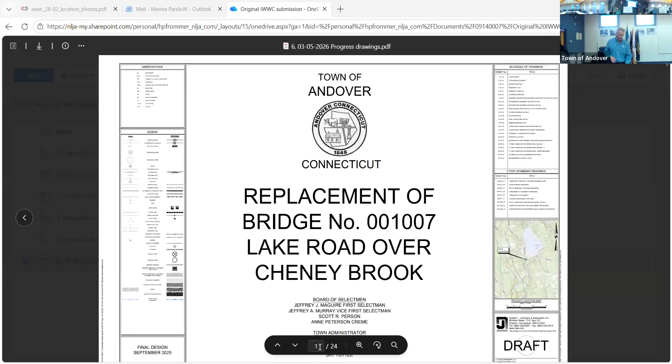I guess you guys probably know Joe Dillon. I've been working on this project for a few years here. It's a town project, so I'm here representing the town. This is a small culvert project, probably big for this town, and it's a grant funded project. I'll get into that a little bit later. I've got maybe 5, maybe 10 minutes of stuff to tell you, just to give you a quick smattering.

You know, this is the first meeting. Some towns don't want me to speak at all, but somebody invited me here today, so I assume you would like a bit of a presentation. Sure, absolutely. Wayne initially emailed me and just kind of told us that this was going on and how we normally go about these things. I said a presentation would just give us a background and an idea of what the plan is and what your thoughts were.

I do think the town is paying for this one, because this is a town road. I haven't gone to the finance public hearing they had the other night. If it was on a state road, the state would reimburse us. So it doesn't make a difference in the presentation, but I do think the town is on the hook to pay for this.

This is a state local bridge program project. The state local bridge program is providing a grant for 50% of the total project cost. So it's probably a $2 million project, and we're on the hook for $1 million. You guys recently had a local bridge program project that was a little different, that was probably 100%, or an 80-20 split. That one was 100%. This one is 50-50.

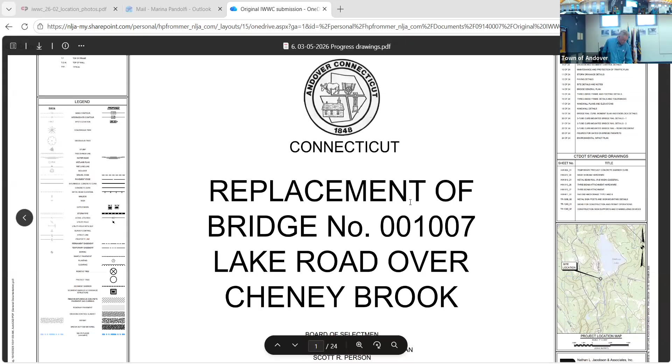Let's maybe go to the next sheet there. How about the colored one? There were individual ones they sent a few months ago, let's go to those. It's easier for these guys to see. Not that one, maybe number 1, it's probably down there.

This is our existing condition plan. The existing culvert carries Lake Road, in an east-west orientation, over Cheney Brook, which flows from the south at the bottom of the sheet up towards the north, towards the lake. The culvert is just immediately east of Bousola Road. The wetlands, you can see the brook which is a light blue, and the shaded blue on the outside of that to the first dark line is the wetland line. The green line way over to the left of the sheet is a 200-foot upland review line, and the next line to the right, the blue one, is 100-foot.

If you look over to the right you'll see a little bit of green, and to the left there's a little bit of light blue. The darker blue dashed line upstream and downstream is the 100-year existing floodplain, just to give you a sense of how much of the woods would flood during a 100-year storm event.

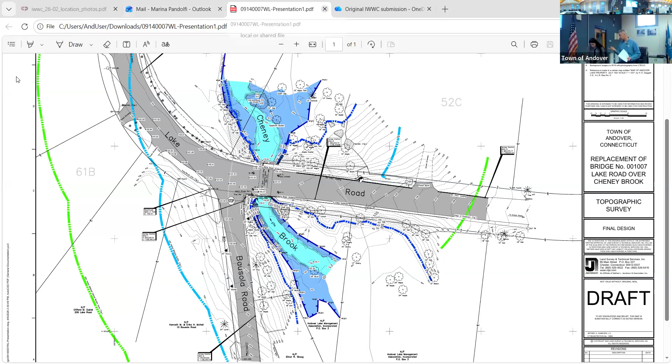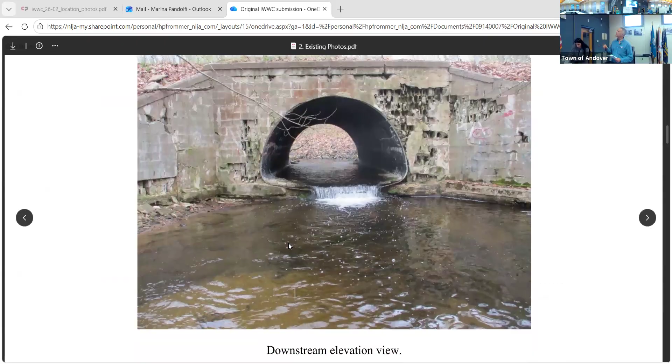So the problem with the culvert is the downstream wing walls and parapets are cement masonry units, and there's 100% section loss of a number of face shells and webs on random sections. Let's see, keep scrolling down. Okay, there you go, good enough to see. So that's the downstream side, each one of what you're looking at is cement masonry units. I don't know exactly what's behind that, it could just be a vertical wall that's not very wide. So there's not a lot left holding the road up.

Roadside barriers don't meet current standards of design, and of course I mentioned the perched outlet. The upstream side of the bridge has cast in place wing walls and head walls, but for whatever reason on the downstream side here, they used cement masonry units.

To show the proposed plan, it'll be the second colored plan. So it was the email that I sent tonight that had two PDFs. That'll be the one that says number... Blue, yeah, that is out in there.

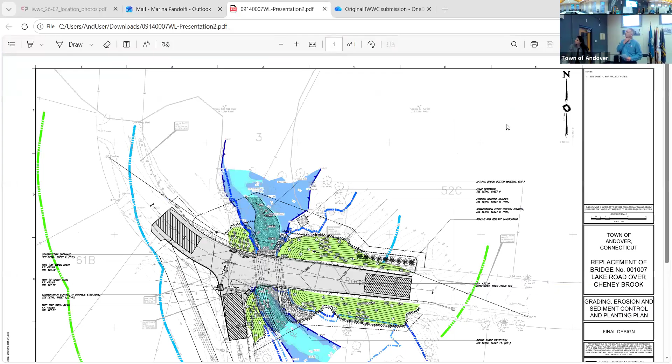Okay, so this is colored. It's a little bit busy, but it's colored, so I think you'll get the idea. The extent of the road work is at the limits of these hatched areas, which are basically road construction entrances. But you can see the limits of the road work. The width of the road is going to remain the same at 30 feet, the geometry is the same, both the vertical profile and horizontal profile is the same. The intersection with Bousola Road is essentially the same, although when you pull out of Bousola and take a right, the radius is going to be enlarged a little bit.

There is some storm drainage. You can see three catch basins around the Bousola Lake Road intersection. Those are going to discharge through the wall of the proposed structure. The proposed structure is going to be a precast reinforced concrete three-sided frame, so it's sort of like a box culvert with no floor.

And that's going to sit - I'll show you a detail later on, you'll understand it completely - but it's going to sit on a cast in place reinforced footing, which is going to be poured directly on the rock. And then the rest of the concrete portion of the bridge will also be cast in place, reinforced: the wing walls, head walls, bridge rail parapet, end walls. I'll show you some details afterwards just to get you a quick view of that.

The bridge was designed hydraulically per the DOT drainage manual for a 100-year storm event based on the contributing drainage area.

Roadside barriers will be improved. We'll have a bridge rail and approach guide rail which will meet the current standards. I'll show you this on another detail too, but inside the barrel we're going to have riparian shelves on both sides of the channel. So for those terrestrial animals - and I've seen this actually - they'll like to run along the edge of the stream rather than having to go up over the embankment, with a potential mortality issue. Now they can go through the barrel. That's what we did - I have seen it actually happen that way, so it does happen.

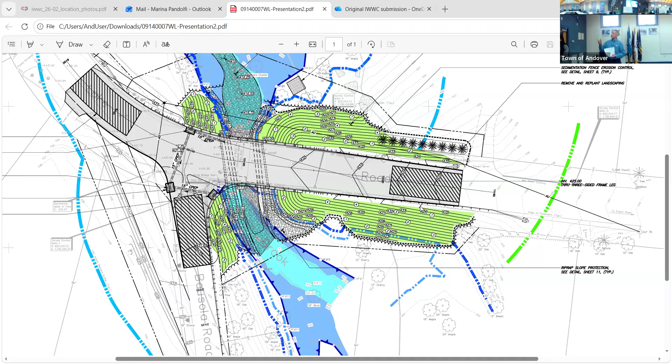From a permit perspective - actually, maybe erosion control perspective, because that's really what we're here for tonight - this is from our erosion control plan. There are erosion checks around the toes of the slopes, which are that green color, which are blankets. So blankets on all the slopes. The inlets, the catch basins will all have controls around those. There'll be construction entrances at the three entrances to the project, if you will.

We have a dedicated pump discharge point at the far northeast quadrant there. If you look downstream of the bridge to the right, you'll see a little square. So it's outside of the wetlands, but in a sort of flat area, so water coming out of that will flow back into the channel. I can show you pictures of the erosion control details if you'd like to see that.

There's also going to be, on this plan, I think we show there's 34 plants to reestablish the embankment.

Okay, yeah, and I think that's going to be it for this one. From a permitting perspective, obviously we're here tonight for a wetlands permit. The town determined that a planning and zoning CGS 8-24 permit is not required. We're going to pursue an Army Corps permit under the nationwide program that came out in the middle of March. DEP granted a 401 water quality certification for the two nationwide permits this project would fall under, to be one of the two. So that's taken care of.

As part of that federal permit process, there's some due diligence work we had to accomplish. We checked the DEP Natural Diversity Database. Based on the last map we saw, this project's not in an area of concern. We had to reach out to the State Historic Preservation Office; they had no concerns. We also reached out to U.S. Fish and Wildlife, who identified a bat and a butterfly that we're going to be dealing with. And we had to reach out to 4 different Indian tribes, and we did not receive any response, but that is very typical — no response is their response, in my experience.

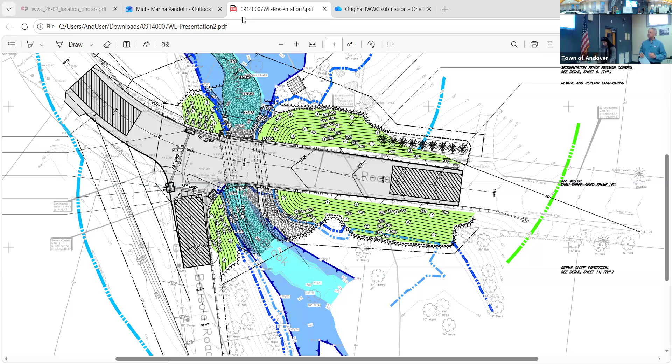So maybe what I should do — can we go back to the big set of plans? I could just show you real quickly the general plan so you can see the structure, in case there's any confusion about what it might look like.

It's in the progress drawings. It's probably about halfway through the setup.

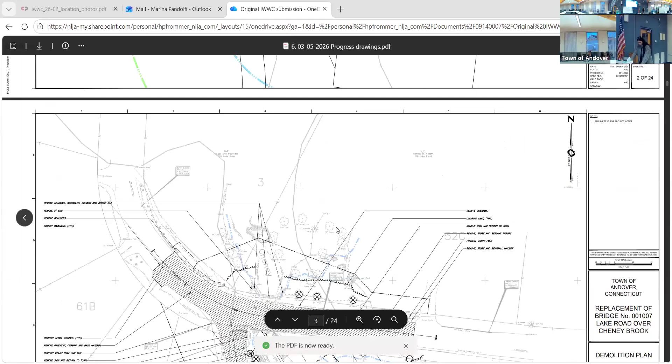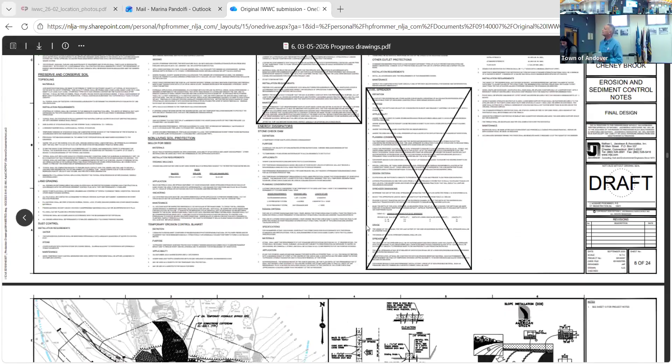Is this the original bridge for this road? I don't know — I'm not that old. For all I know, the bridge there now could have been a replacement for something prior. The lake did used to be there. Never mind.

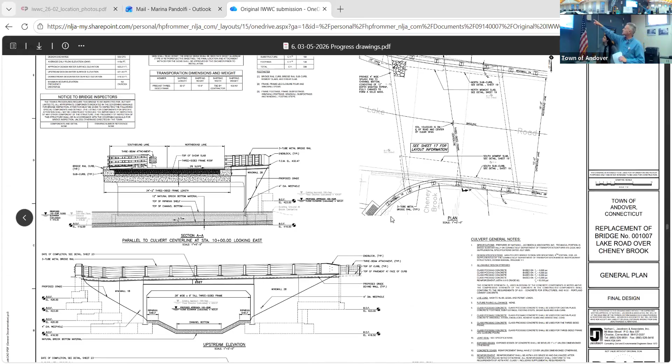Here we go, that's the one. I just wanted you to see a depiction of the elevation view of the structure, for whatever that's worth. And the plan view at the top right corner of the sheet shows the plan of the frame — you can see the parapets along the edge of the road.

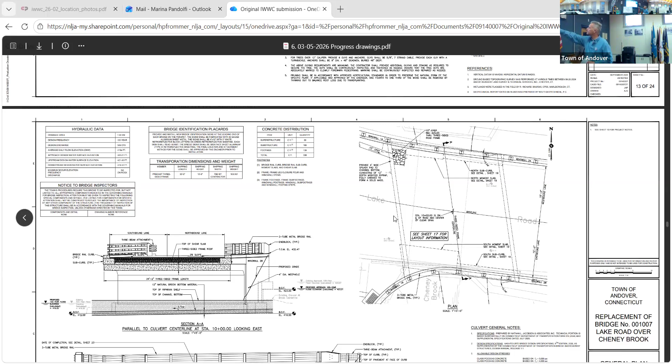But I wanted you to see the storm drain line proposed to come through the wall of the frame, with a bit of riprap beneath it because there's water dripping out, and I don't want it to take away from the riparian shelf or the channel within the barrel. If you scroll the sheet up a little, you can get a sense of the channel through the barrel — it's sort of a trapezoid with two shelves on the left and right.

So you're saying the water on the road is going to go down inside and drain into the river or stream under the bridge?

So the water on the road would get intercepted by the catch basin grates and then conveyed by pipe between those catch basins. That pipe, rather than discharging to the channel outside the bridge, would come through the wall of the bridge and discharge to the channel within the structure. I believe the invert is going to be about 5 feet above the riparian shelf, if I recall correctly.

I had difficulty trying to take that right down to the stream. The embankment is steep down to the stream, and I'd rather not put the outlet right at the edge of the stream. I'd rather have it spill onto something with some erosion control, or ideally let it cascade down a slope with riprap. This seemed to be the better alternative in our opinion. Every town's different.

How far up is the opening out of the bridge going to be? Let me double check with the sheet up there. Yeah, about 5 feet to the invert, a 15-inch corrugated plastic pipe that will go through the wall of the frame, so the invert would be at about the 5 foot level.

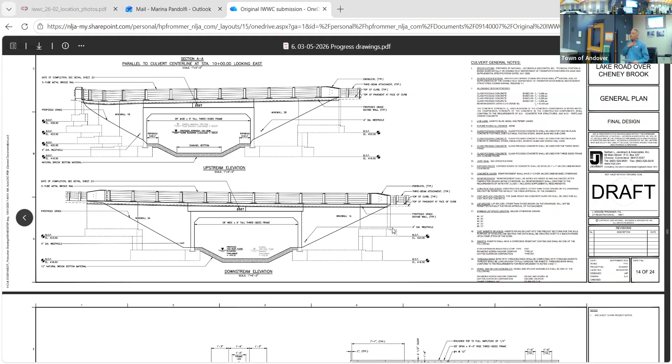How far is the riprap bed supposed to come out into the channel? I show it with a break line here. The intent is we're gonna bring it right down to the bottom, but I should probably make that a little bit clearer. I really don't want it to erode anything on its way down—that was my concern, not causing turbidity inside the channel bottom, washing out that channel bottom and having your sediment move downstream.

Construction period we're looking at is June to October, a 5 month period in 2027. We'll go out probably to bid later this year or early next year. We do have bypass pipes—we've got to do the construction in the dry, so we're gonna put 2 smaller diameter bypass pipes right through the existing pipe, then use sandbag super sacks to create a cofferdam on the upstream and downstream sides of that bypass pipe so the contractor can work dry. That was also designed per the DOT drainage manual, in this case for a 2-year storm.

That's about it, I'm opening it up to your questions. Again, it's a grant funded project, 50% town project. Right now the town is hopefully going after getting the easements—that's really one of the things that would be holding up going out to bid, but we have a little bit of time between now and the end of the year, or the January timeframe when we go out to bid.

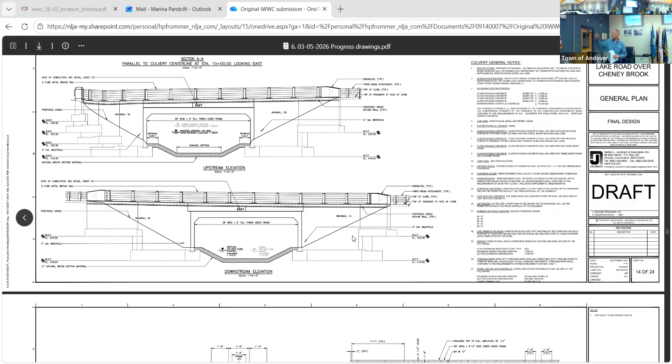Maybe the first thing I should do is go to the very last plan — it's an environmental impact plan in this deck. Maybe I start with that? Sure.

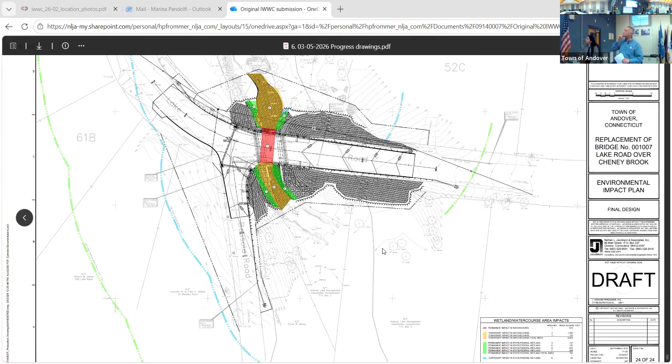There we go. Can you zoom this? So this is the last plan in the set, showing environmental impacts. There's a table off to the right of the drawing, out of view at the moment, but all these little numbers in white refer to that table. For instance, the red number 1 is a permanent impact to the watercourse — that's actually where the existing barrel is.

The green is temporary impact to the watercourse, although I believe this is an error here. On the inlet side on the left, all the grading going back up the hill should be a permanent impact to the watercourse — that should be red, so area 7 really should be adjusted. Excuse me, that's a permanent impact to the wetland, not a temporary impact.

So regarding vegetation impacts — the embankment is fairly steep out there now, and if we're grading the embankment, the vegetation will be disturbed and removed. Trees would be removed, and slopes would be regraded to a 2-to-1 slope. That's why we've reestablished the vegetation.

At the moment it's a typical seed mix. There are 34 plants proposed that our soil scientist recommended based on the moisture of the soil — planting lower near the wetland uses one species, and higher up a different species. That's sort of out of my wheelhouse.

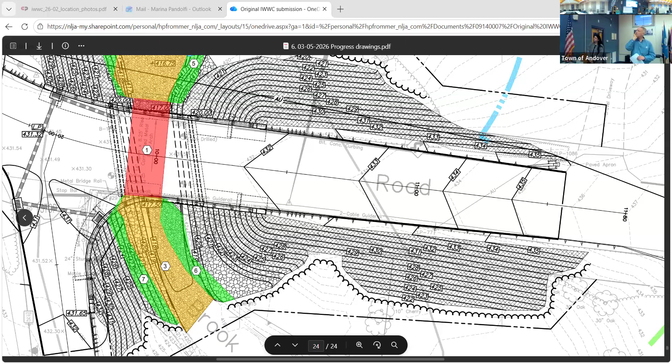So I'm saying it's steep, and it goes right down to the water. Would you think about maybe making it less steep when you get closer to the water, leveling it off a little bit?

To make it less steep getting closer to the water would be a major revision. Footings would have to be dropped on all the walls, because the grade, maybe it's a little less steep at the bottom, I don't know how much you're thinking about. And then it goes up 2-to-1 to make it even less steep, and pushing those permanent grades back would require dropping the footings more.

Our footings are sort of stepped. As the grade climbs, we don't want to keep the footings real deep because it's a waste of money if we don't need to keep them that deep. So the footings get stepped, trying to maintain frost protection over the bottom footing.

I know on the last bridge we were talking about, there was heavy discussion by Hank Gruner, and I didn't hear any of that here, and I don't know if there's just no herpetologist concerned with this one. I mean, the last one was over the Hop River, this one's Cheney Brook, but Hank is a herpetologist?

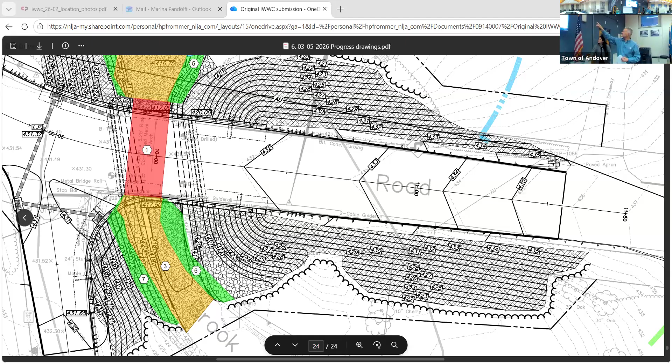I don't know if you could pan so you can see the outlet side, look at the easement lines going around everything. So there's room to move there. Maybe that's a concern on the downstream side, far left and right—there's a lot of white area beyond the woods.

Usually what we'll do is there'll be an inspector on this job from our office. That's the plan at the moment. The contractor is required to use a licensed surveyor to flag the limits, and then our inspector would walk in with them and make sure it generally follows the plan.

I've had projects before, I'm not suggesting this here, where commissions have said, I want you to put a Jersey barrier all the way around the perimeter of the work to make sure, because that's a pretty definitive thing—it's easy to knock a silt fence over, but getting a Jersey barrier, a 20-foot or 10-foot stick of it through the woods multiple times, is pretty disturbing in and of itself. Maybe the thing to do is put up silt fence and maybe snow fence also, it's a little higher, it's orange. Maybe something like that would help reinforce, not structurally, but reinforce that, hey, this is the limit.

So that external limit you have there, is that just going to be flagged or is that going to be silt fence currently? That outside line, the easement line—is it just going to be flagged right now or are you guys actually putting up silt fence? I'm not sure I understand, is it just going to be marked? Like just the boundaries are going to be marked in the field?

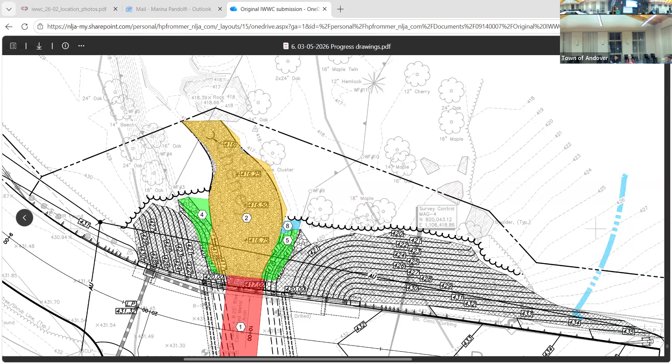If there's sediment buildup on the upstream side of the bridge, how is that going to be handled? Sediment buildup on the upstream side of the bridge.

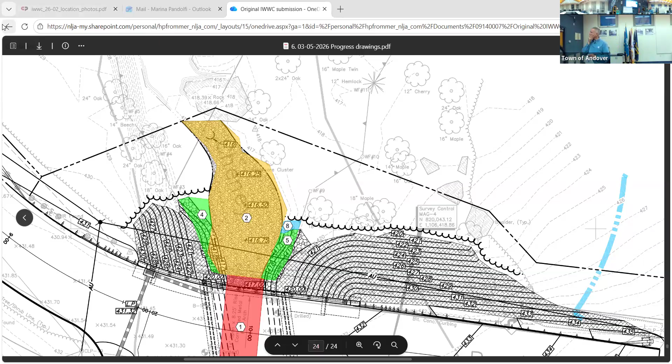Maybe we should look at the water handling plan. Let's do that, it's probably in the first third of the set. So if you have sediment buildup on the upstream side of the bridge, once that builds up, is that going to wash downstream and change the watercourse downstream? Alright, let's take a look at the water handling plan.

I have my work phone, I was putting the passcode in. How long do you have to wait? A minute. Where are you? Oh yeah, we got it fast, it's probably like sheet 8 or something.

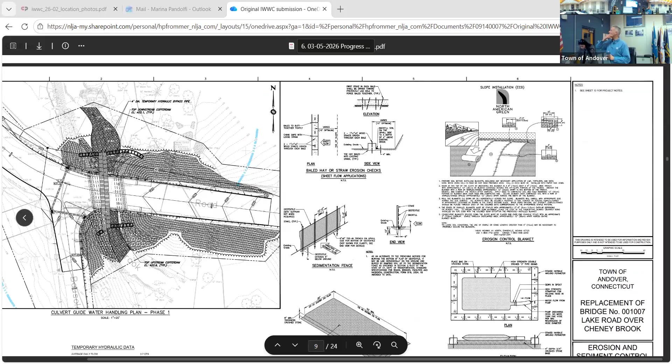So it's the detail on the top left, second one. It just seems weird that they're just one on top of another. All our bridges in Andover are just old, and that's it. We haven't been working on it.

So this is the water handling plan I mentioned before, about sleeving two smaller diameter pipes through the existing barrel with these super sack type sandbags. You guys have probably seen them, they're like a cubic yard, to create a cofferdam up and downstream.

Is there going to be sediment? How's the sediment going to be handled? The cofferdam is going to maintain the flow, so you get flow from upstream, go through the pipes, come out the other side, continue on its way. But is somebody thinking that while that's going on, we're going to get some sedimentation coming down the slopes and into the brook? Are they looking for some more erosion control at the base of the slopes? We have riprap, which is one reason to leave it, because if you do get sediment coming down, it catches there. The other thing is, we have erosion control blanket on all the vegetated slopes.

So will there not be any sedimentation? I can't stand here and say that, but I can tell you it'd be a heck of a lot better than something that was not blanketed, especially because when you first put the topsoil and seed down, sure enough you get a big rainstorm. By the time the bridge is in place, the walls are in place, most of the walls are in place, the water handling can come out of there.

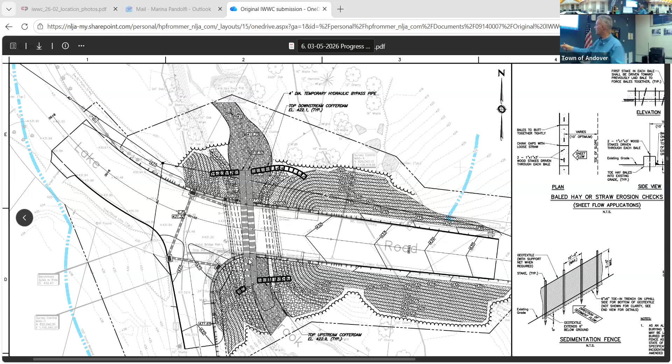Maybe I could point here, just up or downstream. As you go through the barrel on the right-hand side, there's riprap that goes all the way to that cofferdam. Can you see the hatch with sort of the circles in it? And the same on the left side, after you go through the barrel. I guess that's probably what would capture any sediment.

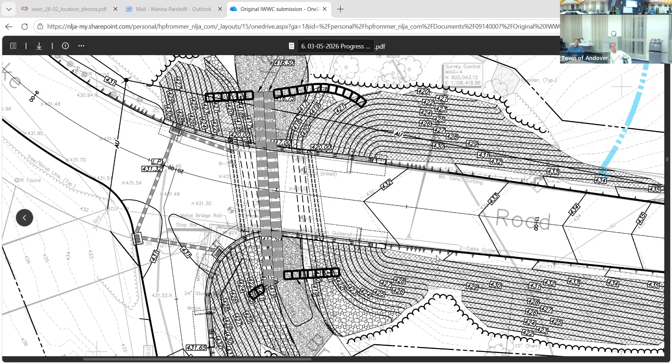Are you gonna be reworking those areas by the road, not right at the stream, but where you have all those lines and numbers? Are you gonna rework that whole area, or are you gonna leave what's there? There's rocks that are there. So I could point to it here. Is it right here, Bill? Yeah, that spot, but you're along the stream edge. Can you zoom into the outlet area in particular?

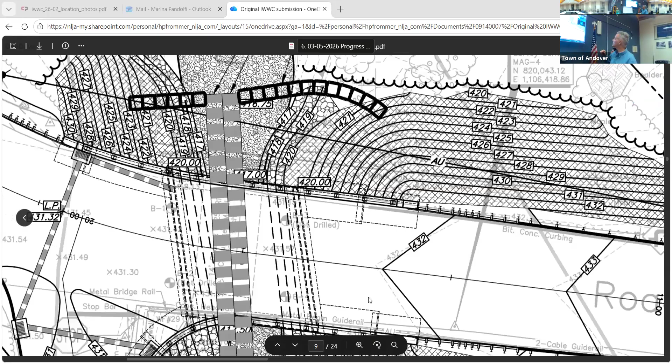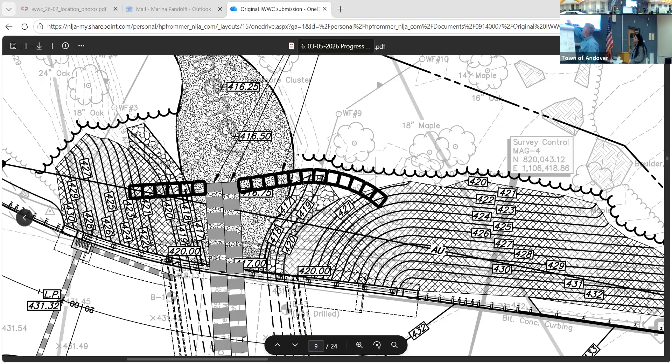Okay, so this area is sort of a continuation of the riparian shelf. It's fairly flattish compared to the 2-to-1 slope. So to your point, you come out of the channel, the channel needs to have a little bit of a defined bank, and you're coming up out of that channel about 3 feet. And then it's a somewhat level area, that's sort of the end of the riparian shelf. It gets a little wider as you come out of the bridge, and then the slope begins to come up.

So to your point, you've got a channel, it does flatten out a little bit, and then it goes back up. I don't know if that's answering your question. You can see that over here too. Comes up about 3 feet from the channel, because that's what we have going through the barrel - sort of a little trapezoidal channel. And then this flattish area here, it's not completely flat, it's about a 1 foot drop across it, but it's flatter than 2-to-1 considerably. And that's the continuation of the riparian shelf. And then from there, it's 2-to-1 back up.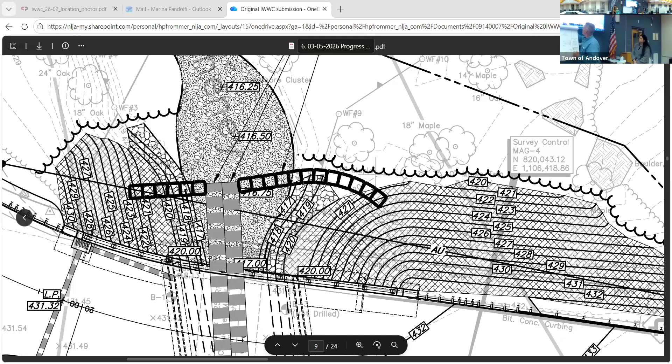And you can look at the inlet side too, and maybe you can see the same thing over here. You can see the same thing here in this area, and then over here, as you approach the barrel on the left.

Okay, I guess my question really is, are you gonna rework it, and is this all gonna be redone along the road there? Oh, per these plans, yes. Because there's stuff there already, and it kind of looks similar to what you have up there. Yeah, if you really studied it and looked at another plan that has just the contours, but none of the hatch, you can see the proposed contours versus existing. I mean, I could show you that.

So you're gonna redo it - kind of the same, but not really. We're gonna redo it. Yeah, in some places it's very steep. You're gonna redo that whole stuff, cause...

Somebody dropped a whole lot of rock out there already. I don't know if you've seen it. I haven't been out there in a few months. Yeah, there's a lot of rock there already. Where was that drop? I was gonna say, I don't know why it was put there, it was just there. Something recent? Probably for the same thing we've just been talking about - silt running down off the road and off that slope, down into that area, into the stream. But because there's so much rock there, there's not gonna be a lot of silt coming off of there.

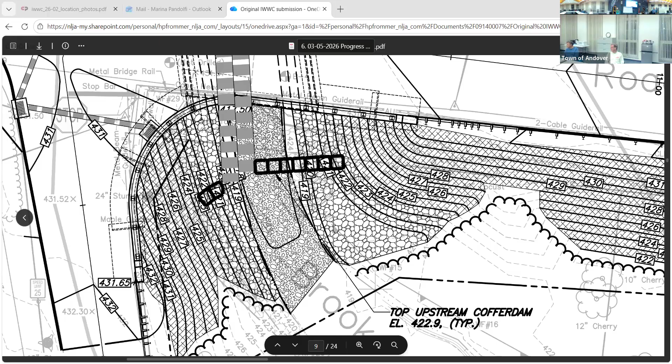So we received the application, so it'll have to be till next month till we approve it. I'll reach out to Hank and see what his thoughts are. I'm gonna reach out to Wayne too, see where we stand or how we go forward without a wetlands agent. I'm sure Wayne will be in contact with you.

I'd like to put some things in here, like I said I would do, the turtle notes and photo, if you'd like me to do that. I think it's probably a good idea anyway, and about the wood turtles, regardless of whether you guys wanna worry about it, I'll put it on there. The notes, the time of year notes to comply with the Army Corps.

When I do this, should I resubmit revised drawings for the record? How do you like that? Give them to you a certain number of days before your next meeting. I would reach out to Wayne, because Wayne was in contact with you before this meeting, correct?

No, no, I'm not sure. I got an email from 3 different places in town. It was signed by Wayne, but something said admin at Andover, zoning at Andover, and building something at Andover. I'm not really sure. Building is probably Lynn. Zoning is Wayne. Admin, I don't know, I think that would be Lynn too.

Let's see, I should know. Yeah, zoning would come from Wayne. Who's Wayne? The zoning agent.